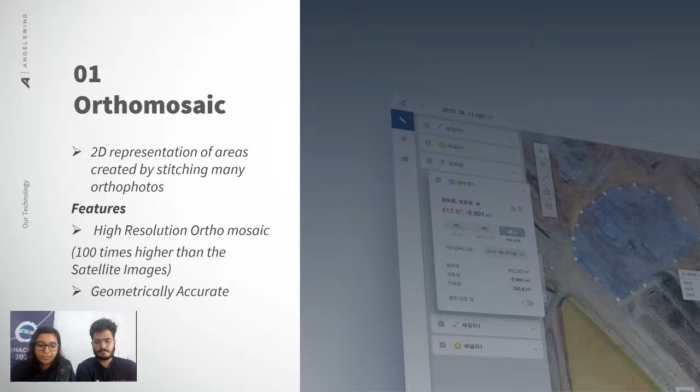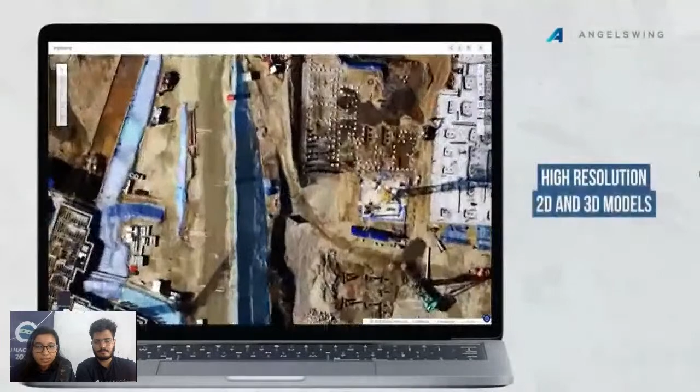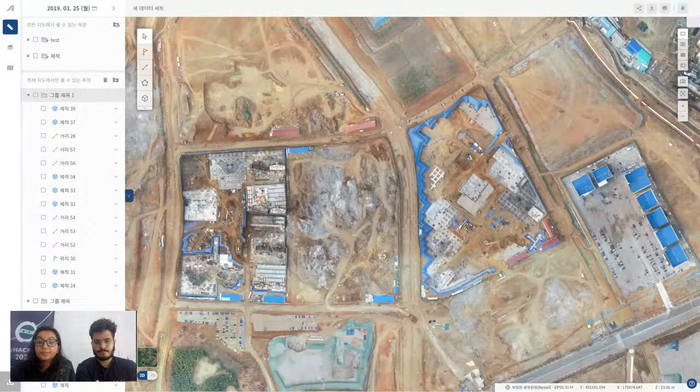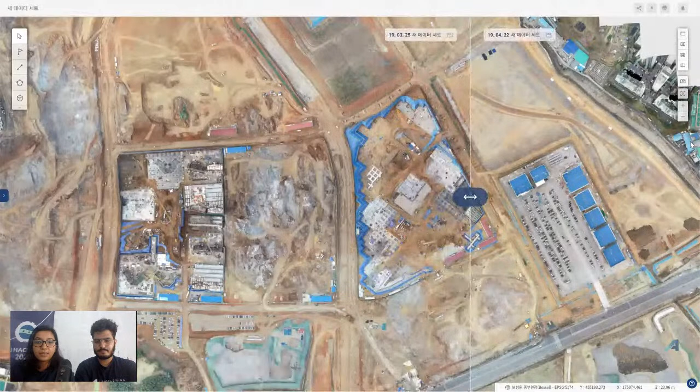So here we present the video of how the orthomosaic is being done. We take the images from different regions of the field, and these images are uploaded to create a full map. This is geometrically accurate, and we can also compare the orthomosaic between the previous month and the next month, trace what kind of activities are incomplete, and make the plan and progress according to this analysis.

So some of the tech stack used for creating orthomosaic: one of them is the drone. Obviously, we take the images, and here we use the DJI Mobile SDK, which controls the software and hardware interface in the drone, and also the UX SDK, a software development toolkit, which provides the UI elements for all the core functionalities. The second most important thing is GCP preparation and detection.

GCP here represents ground control points. It is a reference point which is used to establish the actual or accurate position of the drone image. So using the GCP, we calculate the position of the place, and we use RTK, real time kinematics, and PPK to measure the GPS position.

And for the requirements to create GCPs, there should be at least 3 GCPs, they should be clearly visible by the drone, and they shouldn't be covered by any kind of trees or vegetation. So we can easily locate the GCP, and we can use it for the image calibration.

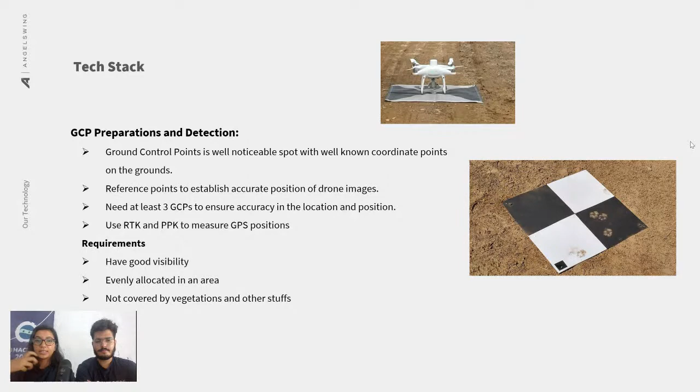Another tech for orthomosaic is GDAL. After the creation of the orthomosaic, we need to overlay this orthomosaic onto Google satellite or OpenStreetMap. In order to overlay it on top of this map, we have to make sure that the orthomosaic is geometrically oriented and well georeferenced. So we need to convert the PNG image or the JPEG image into the TIFF format, which is provided by different tools like GDAL.

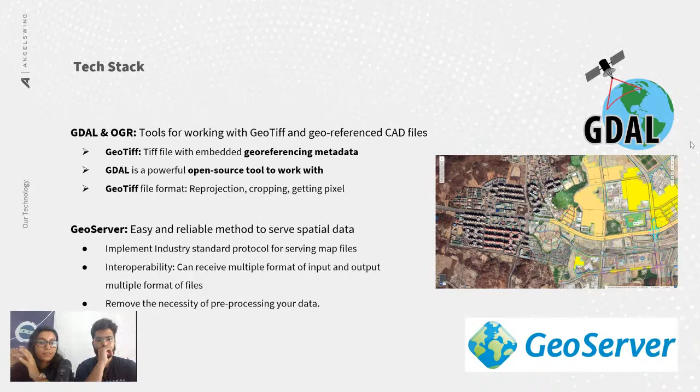Also, there is GeoServer, an easy and reliable method of serving spatial data, and it can receive multiple formats of inputs as well as outputs at the same time.

The second technology which can be used with orthomosaic is the CAD overlay. CAD here represents computer aided design. It is a precise design or plan for any kind of building or site, which is designed by civil engineers and architects.

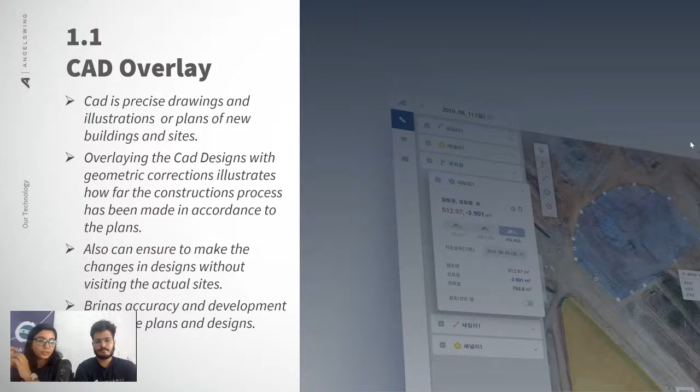So we overlay the CAD on top of the orthomosaic to trace whether the construction has been done according to the plans, or we can also change the designs with respect to the construction or with respect to time. The best part is the person doesn't have to visit the site daily, so it minimizes time and brings accuracy with a digital tracking system. So here is a video of how the CAD is being overlaid on the orthomosaic.

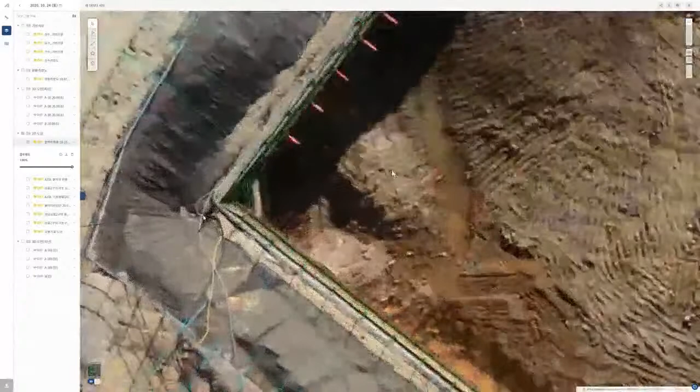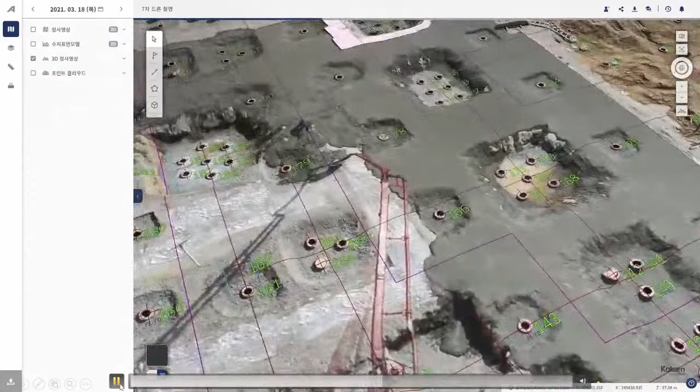So it is geometrically accurate, and in the next video we can also see the CAD being overlaid over the 3D model.

Now the second service that Angelswing provides is real-time image stitching. It is similar to the orthomosaic. In orthomosaic, we give high resolution images, so it takes a longer time. But there are many situations where we need to make a quick surveillance, or we need to identify a disaster. For this, real-time image stitching provides good help.

As soon as the drone gets the images from the surface or the regions, the images get stitched sequentially, and this can be easily seen in the video. Here the images are being stitched sequentially, which helps minimize the time, and we can easily locate what is happening in the overall region by this orthomosaic.

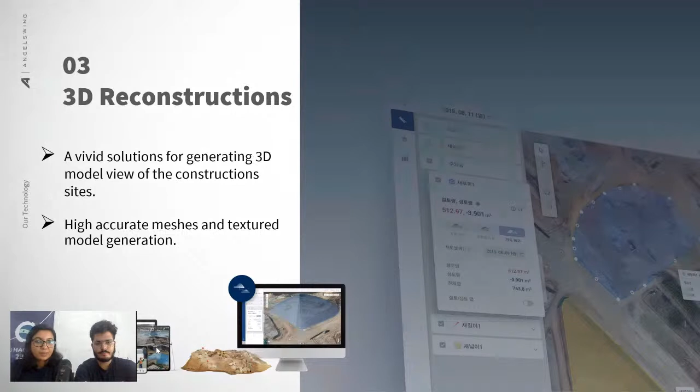One of the services which is trending at the current time is 3D reconstruction. Angelswing provides this service, which is used for better visualization of construction areas and buildings. It provides highly accurate meshes as well as better texture. So this is an example of 3D reconstruction.

For the tech stack, I've created a brief explanation of how the 3D is reconstructed. Let's go to structure from motion. Structure from motion is the process of creating a 3D scene from 2D images. These 2D images are RGB images. They don't have depth information since they are taken directly from the drone in our platform. And it goes through different stages.

The first one is the image calibration stage. Like I said earlier, we need to set up the GCP, and this GCP will be used for calibration. The same stage goes here too. For making our images distortionless, we use the GCP points. But if we don't have GCP, we use the metadata of our drone images. Metadata represents data like latitude, altitude, yaw, pitch, roll, omega. We use these values to calibrate the image, to make it distortionless so that it doesn't get affected by human errors or sensor errors.

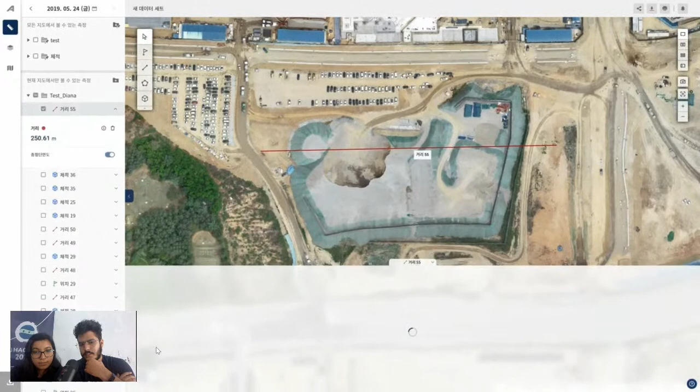So next. Our Angelswing uses elevation profile, as we can see here. This is a construction site whose elevation map can be visualized. For this line section, we can see the different elevation peaks and valleys, and we can also visualize past data and compare how the elevation has changed over time or during the period of construction.

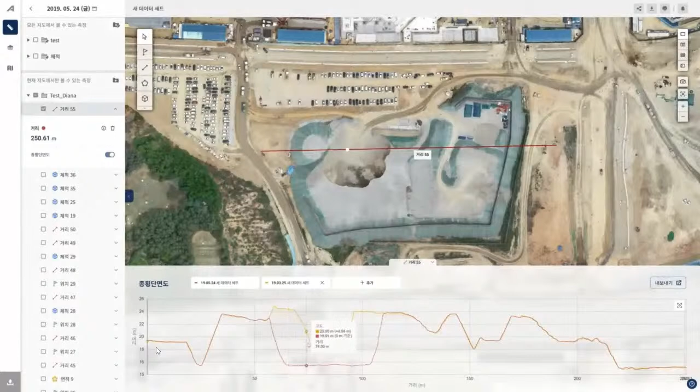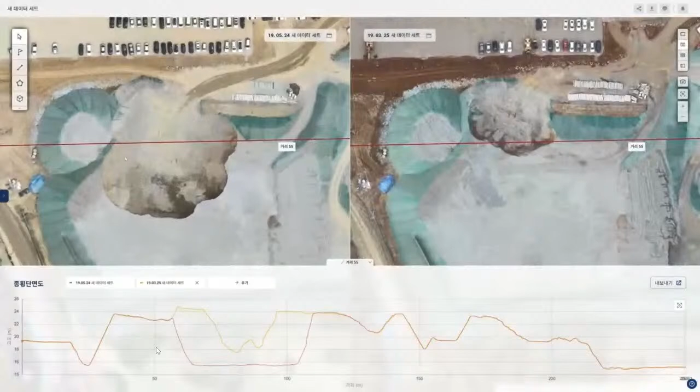So it will provide very useful information for surveying the construction site, or it can be used by engineers to calculate the volume of the sand or the area. So it is quite a powerful tool to have.

And the next one is digital elevation model or digital terrain model. It is a topographic model of bare earth, and it contains elevation data in digital format, which means it contains the elevation data of the surface of the earth, and it doesn't contain any information about man-made objects such as buildings or skyscrapers.

It only contains the region where the earth surface, or maybe mountain hills and peaks, elevation information. And I've explained previously about contour generation and orthophoto calibration. Similarly, it is also used in construction planning, as it can be used to check the steepness of the slope or the region where the construction is to be made. We can first see the digital elevation model to see how the terrain has changed over time, and how we can plan and coordinate the construction

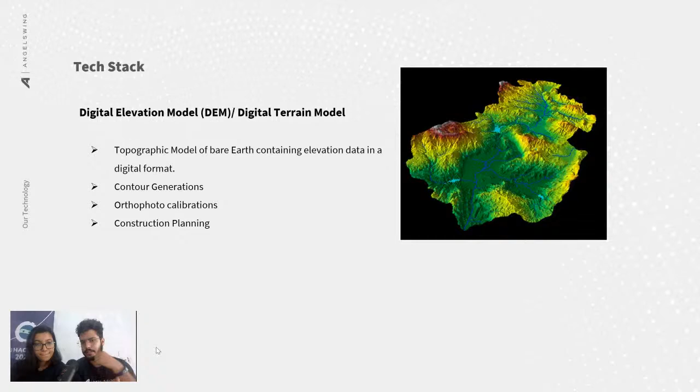process after that. So, safety mapping. Safety is one of the most important things that Angelswing provides. On construction sites, we hear about many people dying due to construction communication errors, or due to disasters that happen for many reasons. So safety accidents occur because the actual site is different from the situation discussed at the meeting.

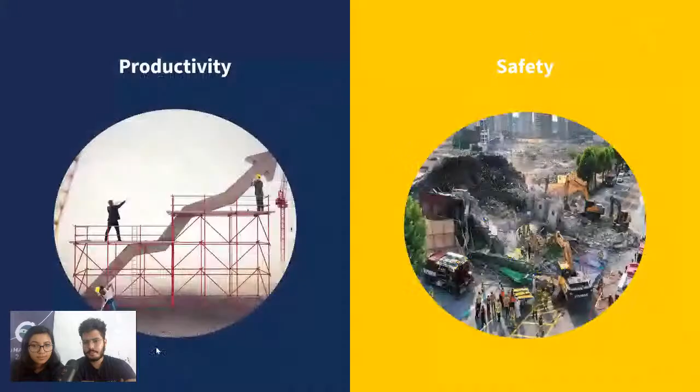That means we plan the construction process in the meeting separately, and while performing the construction in action, there occurs some miscommunication or lack of coordination, which causes different disasters or a loss of life. So site planning and coordination helps in the safety of the individuals who are working, and it also saves 50% of productivity loss. And next. So yeah, using a 3D model to plan and coordinate the construction site increases productivity as well as safety.

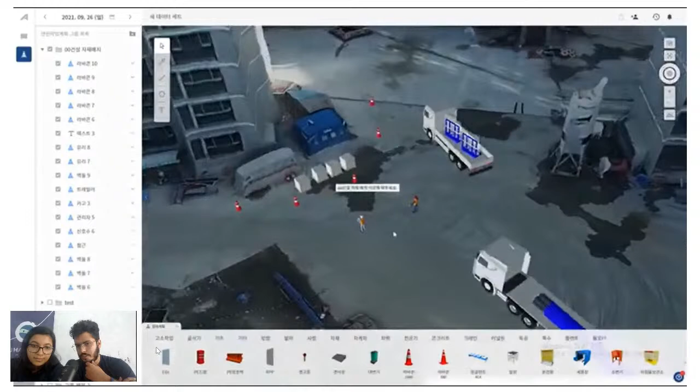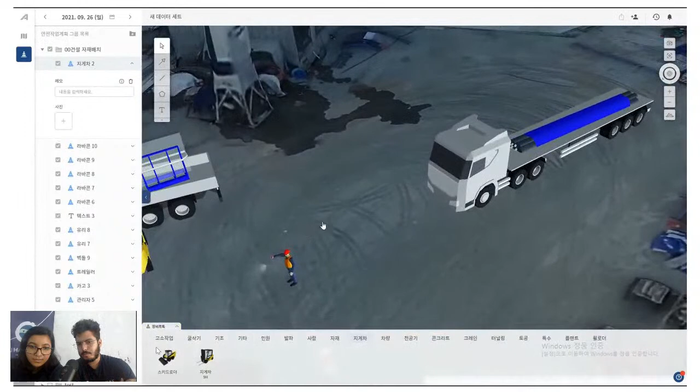So in this video, we can see the construction site 3D object can be visualized here, and we can add different 3D objects which are used in real construction sites, such as dozers, pipes, or cones. And before actually performing the construction operation, we can simulate it in the meeting and check the routing where the 3D objects are placed. It will simulate the equipment positioning and route planning.

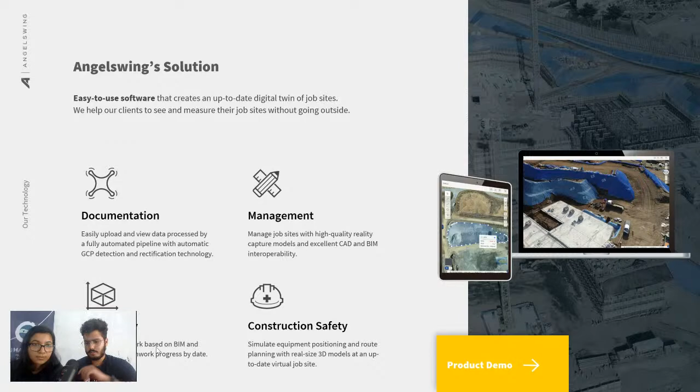That means we can put the real size 3D models, and we can check if it causes some hazards or not while doing the construction operations. So there won't be any miscommunication or miscoordination that will cause loss of life and many other issues. So I'm going to show you a quick product demo of our platform.

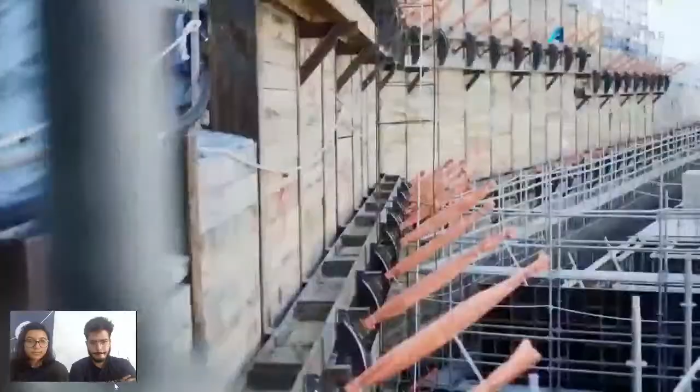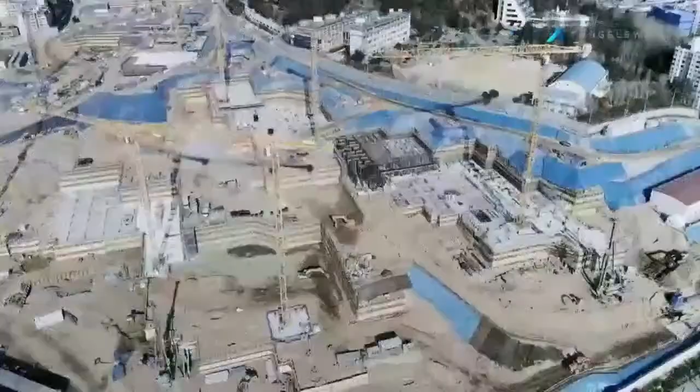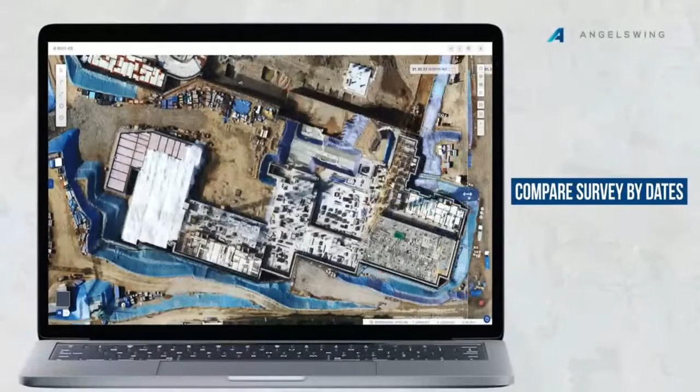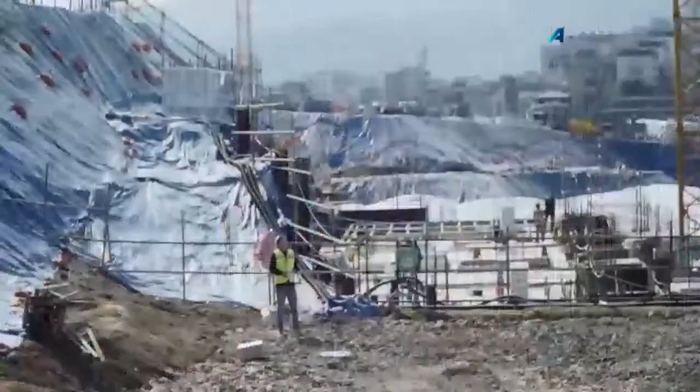Job site digitalization, productivity enhancement, and next level construction site management. Start with Angelswing's drone data solution. Let's take a look at how Angelswing brings you the best value of drone technology for your job site. Angelswing improves job site management efficiency through accurate surveys and easy measurement tools. Simply upload drone images to view high-resolution 2D and 3D models. The CAD overlay feature introduces a new way to intuitively monitor and analyze job sites. Precise measurement tools make earthwork much easier. Calculate distance, area, volume, and 3D design based earthwork volume of your job site. And create elevation profiles with just a few clicks. With high data compatibility, work in conjunction with other softwares; convenient sharing and printing features enable quick and smooth communication among stakeholders. Still hesitating to adopt drone technology? With Angelswing, no need to worry at all. Successfully adopt drone technology at your job site with Angelswing's professional consulting service and customized drone operation for your job site.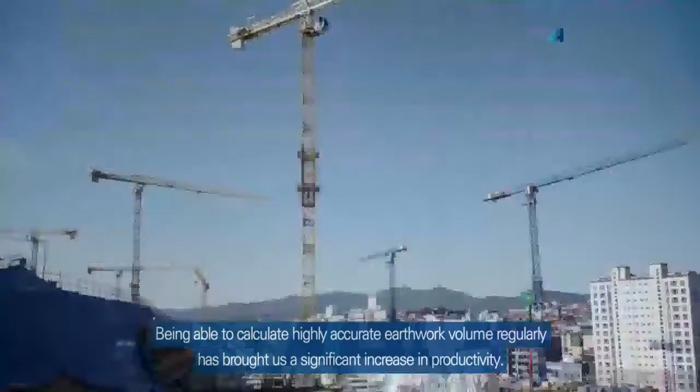Experience construction site innovation with Angelswing, the best partner for smart construction leaders.

So yeah, Angelswing has been leading job site innovation of the top 20 construction companies in South Korea. From Samsung to Hyundai, many companies in South Korea use Angelswing for their construction site preparation and planning. And we can say overall 70% of the top 20 Korean construction companies are using Angelswing. So yeah, Angelswing is a digital twin platform for job sites, which means we create a digital version of the job site, which depicts the real world job site.

And by 2030, Angelswing will create a service where we can monitor anywhere, any place in the world. And that means we can create a digital twin of the whole Earth, and we can visualize and plan accordingly, and we can also solve real world problems by using it.

Thank you so much, Sridhar. So yeah, we have an exciting offer for you all. I hope you get a clue or idea about what service Angelswing has been providing and how the mapping solution has been very productive for the job site.